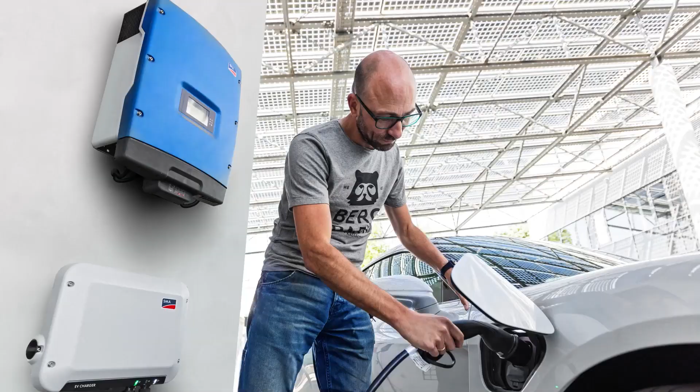In 1981, three engineers founded SMA and became pioneers of the global energy transition. Their vision was to provide renewable energies to people across the globe. Our mission is now more relevant than ever. We want to shape the energy transition with your help.

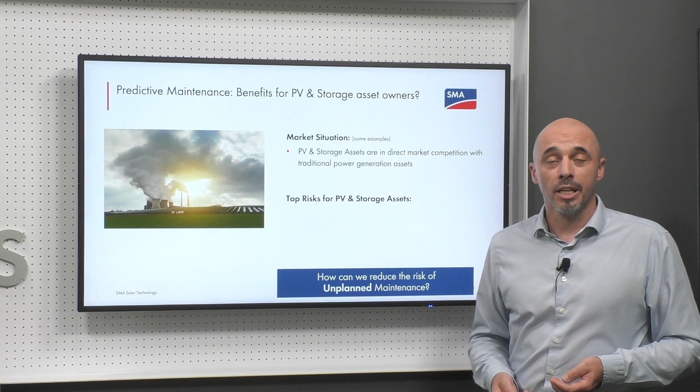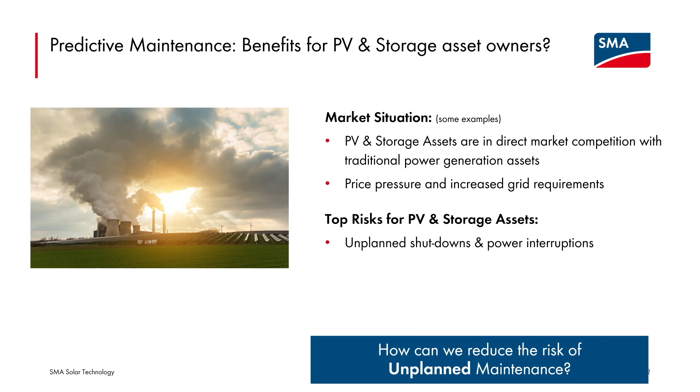PV and storage assets are continuously more in competition with traditional power generation assets. Now the assets in PV and storage plants are under price pressure, and the grid requirements are not getting easier. While there are several risks for PV and storage plants, unplanned shutdowns and power interruptions represent one of the biggest ones, with economical impact.

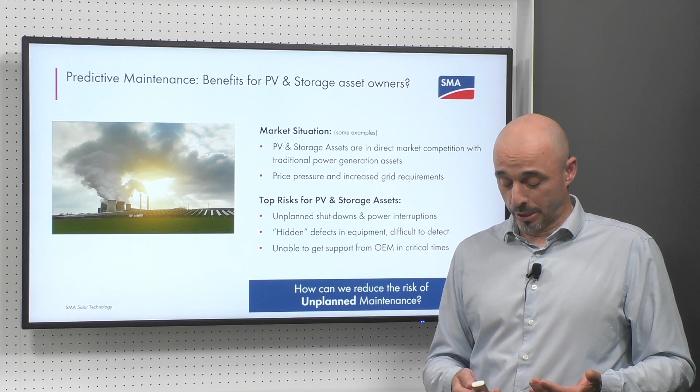Then we have hidden defects on the equipment that are hard to detect and also hard to react to. What is even more disturbing is some OEMs have left the business or are hard to get—think about the pandemic and travel restrictions, and how you want to get the specialist to site. All this together, unplanned maintenance represents one of the biggest commercial risks for PV assets.

So how does predictive maintenance differ from traditional maintenance? We have two basic options. Preventative maintenance is an action that follows a time schedule—parts get exchanged, it's 100% plannable, zero risk for the asset owner, but you may have to exchange a part before its lifetime has ended.

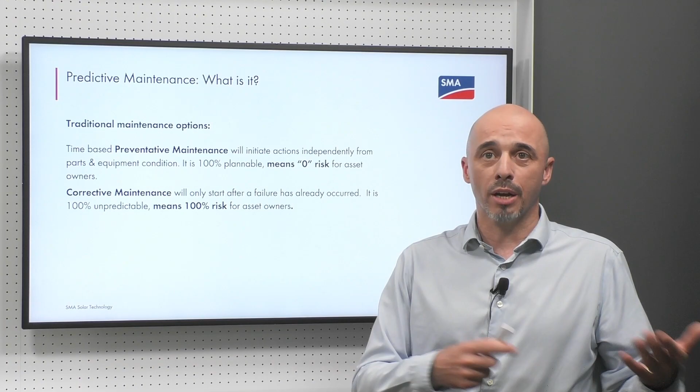Then you have the other one, corrective maintenance. A failure happens and you have to react with a service, with a part. It's 100% risk, you can't foresee it—it could be huge, it could be small.

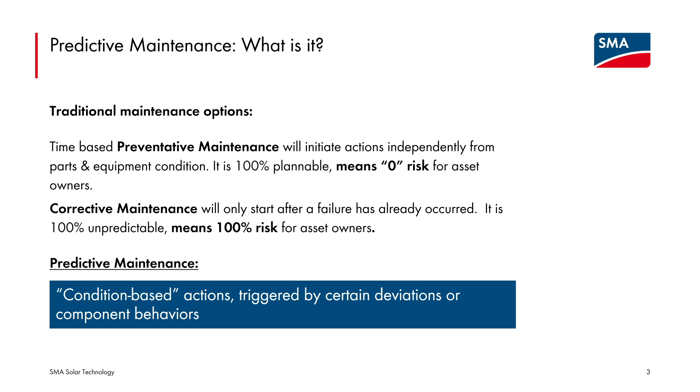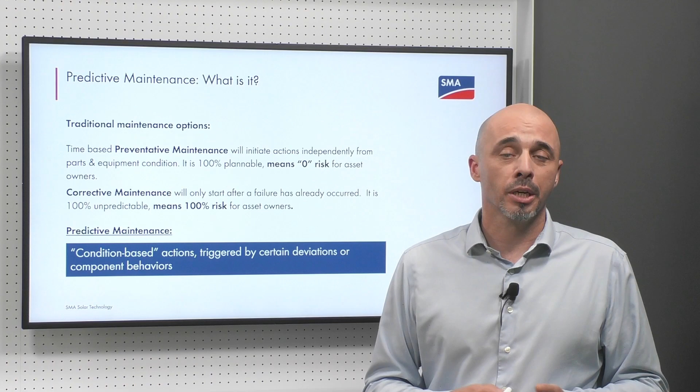So in predictive maintenance, we at SMA try to define condition-based actions. That means we monitor the condition and trigger a certain action based on a deviation or component behavior we observe. Combined with our knowledge and algorithms, that should lead to much slimmer, less costly maintenance. We have all the building blocks at SMA to develop this algorithm, but also to verify that they are correct and not just false alarms that trigger blind action.

Then we have a huge installed fleet. SMA has installed and delivered more than 100 gigawatts globally on inverters. We have data from all operating conditions and environments, and a combined 40 years of experience in field service fixing our equipment in over 130 countries. Our target is really to change the ratio between planned and unplanned maintenance using our smart algorithm, making unplanned risk plannable, reducing downtime, and reducing risk for our owners.

In order to show you how we do that, that's why we have Matthias invited here to show you in a deep dive what we call our algorithms for predictive maintenance. Stay tuned. Thank you.

I would like to give you some technical insight on how SMA approaches predictive maintenance.

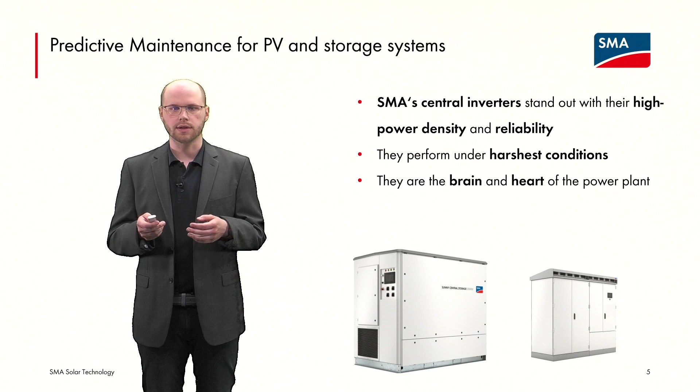We started in the first step with our central inverters, the Sunny Central CP, the Sunny Central, and the Sunny Central Up, because they stand out due to their very high power density and reliability. They stand outside and are exposed to the harshest conditions, in very cold, very warm, or very moist environments. Due to this, they are also the brain and heart of the power plant. They see what's happening on the side of the PV panels, at the battery, in the grid, or inside the inverter. This brings them into an ideal position to act as key to the power plant's maintenance.

Let's look at which issues and components we can analyze. We already have a solid background for fans and power stacks, where we can analyze upcoming issues early and alarm our customers when necessary. The next feature set is the isolation resistance of the PV panels, where we have functionality that gives insights on issues on the PV panel side. We also have background on AC side issues, such as over frequency, over voltage, under frequency, and under voltage. If those happen frequently, we can alarm our customers so they can, for example, talk to their electricity company.

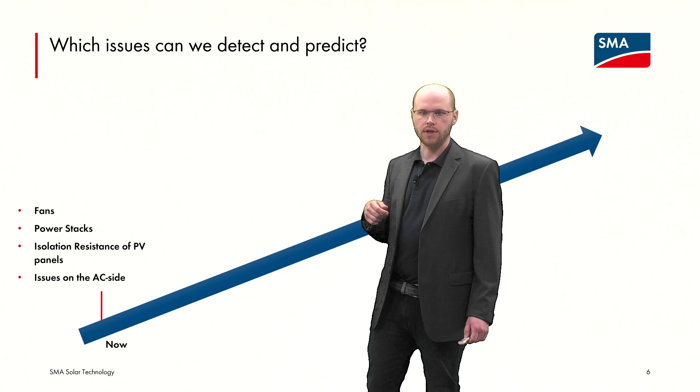As some future steps, we will focus on components exposed to wear and tear, such as the AC and DC switches and the GFDI, so they can be replaced when necessary and not necessarily according to plan. We will also focus on obstacles in the airflow of the inverter, which could cause issues such as frequent overtemperatures, or could be a root cause for other faults. We also want to understand other issues we might have missed, so we can improve our algorithms in the future and alarm early.

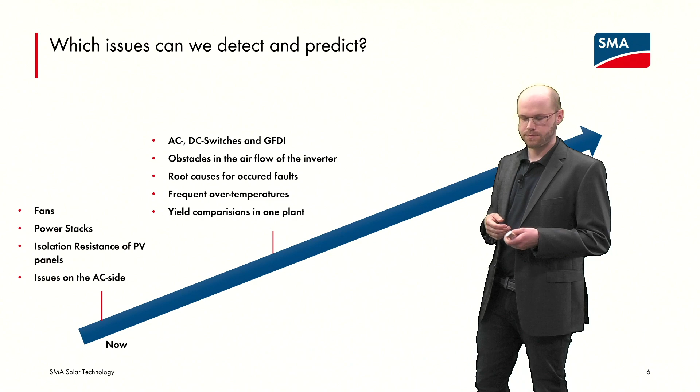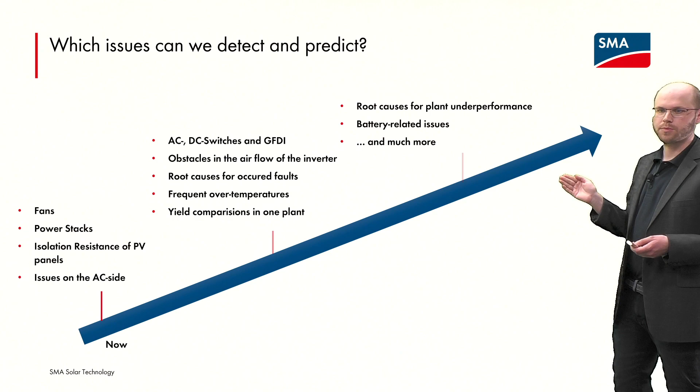Another huge leap will be comparing devices within one plant, to see which devices perform well, which do not perform so well, and then indicate what should be done. Other future steps will be to further analyze underperformances, see the root causes, and rectify them. And of course, we will continuously extend and apply our algorithms in the field, not only for PV power plants, but also for battery and hybrid plants.

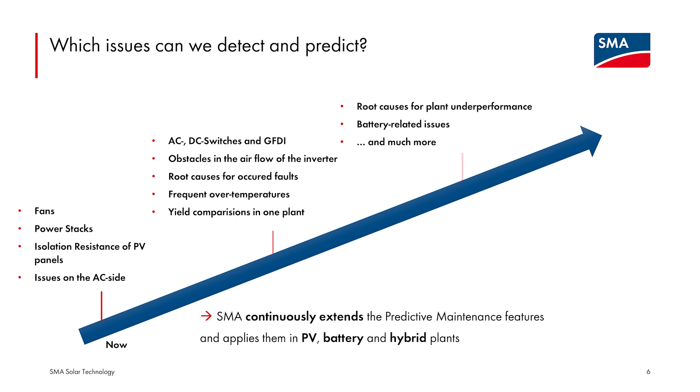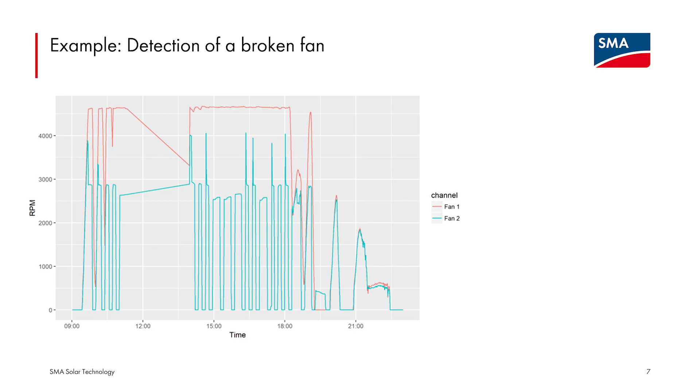To give you an idea of how the algorithms work, we'd like to show you the example of a fan. What we see here is a curve of the fan speeds in the cabinet of the CP inverters. These curves should be overlapping, and we see here that clearly is not the case.

I can show you here in the middle of the day that the red curve and the turquoise curve should be overlapping, but obviously they aren't. The turquoise curve, representing the fan speed of fan 2, is always much lower than fan 1, and we see here that we have a clocking pattern. So the fan tries to achieve high speeds but fails to do so and switches off entirely.

From the experience of our experts, we know this is an indication of a short circuit of the windings of the fan, which results in a complete failure of the fan within weeks. So by replacing this fan, fan 2, early, we gain a couple of weeks of time and avoid underperformance of the plants.

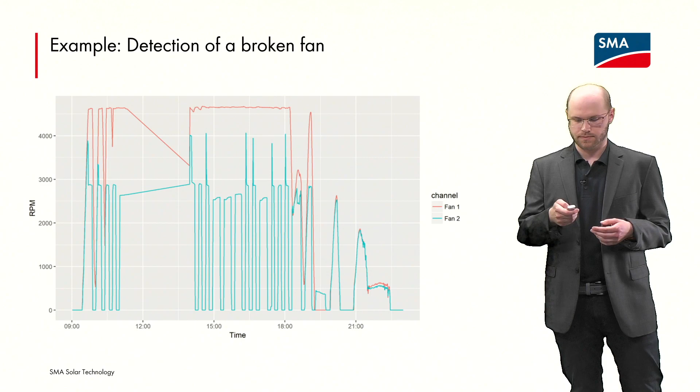But of course, the algorithms alone are just a small piece in the entire chain of the predictive maintenance algorithms. And key is always the customer, who is at the end and at the beginning of the entire predictive maintenance chain.

After talking to our customers, we can connect the inverters and power plants to our backend, for example by switching on FTP push, or connecting the power plant manager to the plant and activating it so the data is sent automatically. Then, respecting all aspects of cybersecurity, we send the data to our SMA backend and store it in a large database.

In this large database, we have our predictive maintenance algorithms running, looking for anomalies in the plant at all times. If they detect an anomaly, we can see this in internal monitoring tools, and we can also create service tickets in Salesforce.

If that happens, our service technicians see this in their everyday work and can talk to the customer and decide on the next steps to rectify the issues.

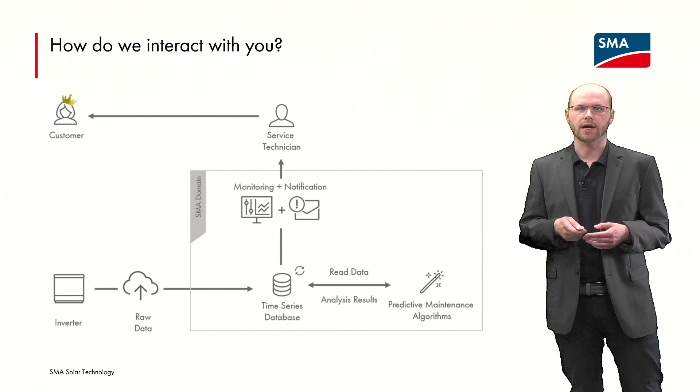And this isn't just an idea, it's a system we have up and running and are currently applying in a field test. To elaborate a bit more, it's not a small field test. We're doing this globally with lots of customers and have around 1 gigawatt of inverter power under maintenance in our monitoring.

By doing so, our customers can already benefit from the feature set for predictive maintenance that we have right now. As we gain experience over time, our feature set will improve, grow, and just get better. This is the end of the deep dive, and we'll switch back to Bernhard to continue with the presentation.

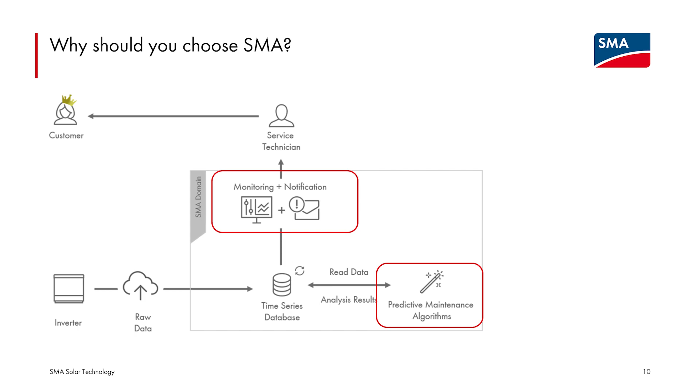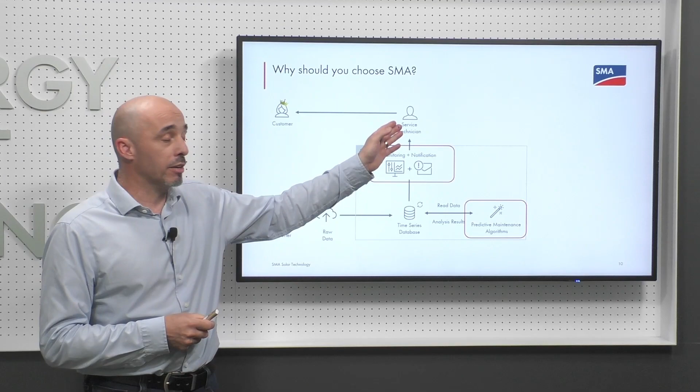One main differentiation you can see here on the screen. In the market, you find a lot of companies that offer monitoring and notification services if something fails or deviates. Some competitors offer predictive maintenance based on your data. If you look at SMA, we can provide the complete system from the knowledge of the inverter and how it's designed and built, to the sampling of the data, to the monitoring notification piece, and we have the algorithms we developed ourselves. At the end, we even have our own technicians that go to site and can verify that it's not a false alarm, but really a serious issue that needs to be taken care of right away.

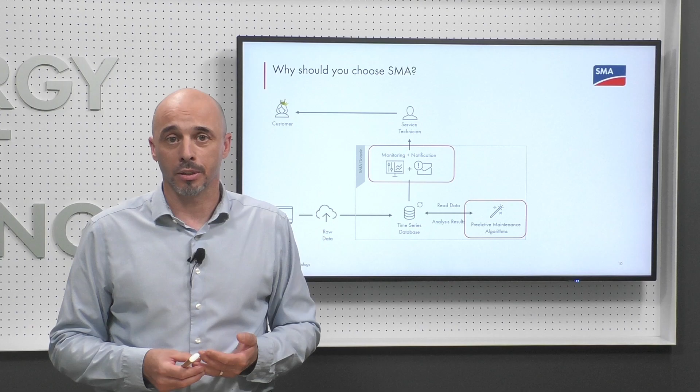By owning the complete chain of events, we can also be much faster in reaction to the customers without having to go over different company boundaries and then inform a lot of people. This opens up the possibilities of a lot of benefits that customers can get out of it.

First, it's a significant reduction for unplanned shutdowns. That's, of course, the main purpose of predictive maintenance. With that comes an increase in uptime for your asset, even more important for storage assets. You can opt to plan better, include this in your maintenance planning and maintenance tasks, so you take the stress out of your company. And with that, of course, comes a lot more simplified labor and parts planning.

Think about just the last 18 months that we have passed through the pandemic and what stress that put on logistical issues and on services to travel to site with restrictions in place. So here we have a simplification and a relaxation of the whole chain that comes into action once you have a failure.

Look at the costs at the end. It aims to reduce costs on your services, and it makes your OpEx plannable and optimizable. With this, we can create a true win situation for our customers, an end-to-end data chain that comes from the inverter until the action in the field.

And this opens up the possibility of automation. As an example, what we can do with predictive maintenance and with the data, that also not just serves our technician, but the customer's technician or anybody out there that works on our equipment, is our virtual support app that we have been launching since last year, and that's basically rolled out in the field. We have a video with us that we will show you that shows the usage of this data, and it's part of the journey to a digital service world that we are already on. So please enjoy the video.

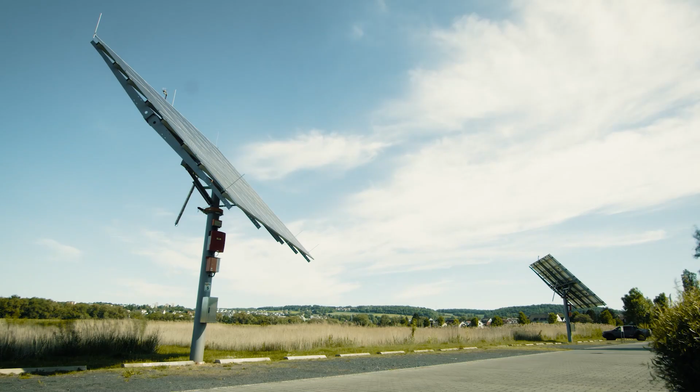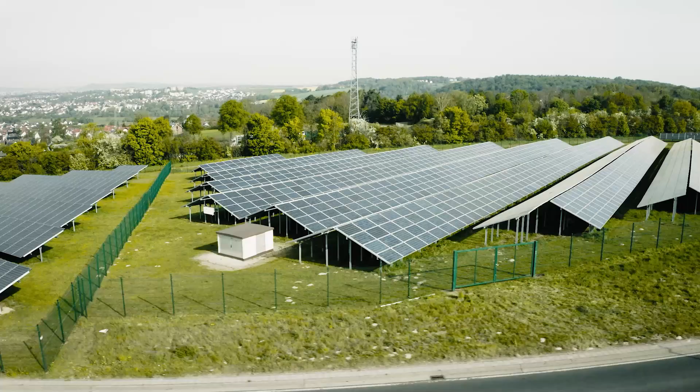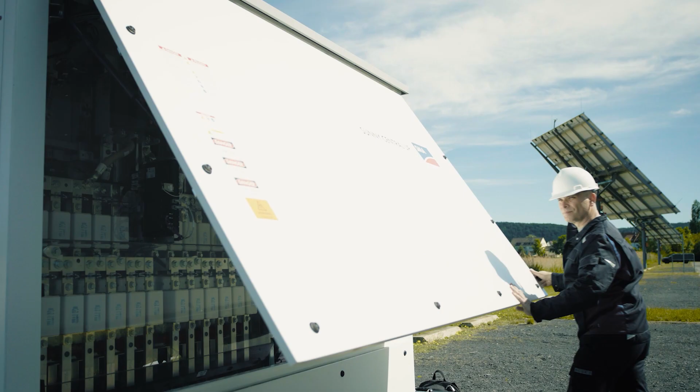Unscheduled breakdowns, repairs, or maintenance work can often lead to costly downtimes. The waiting time for a service technician is usually much longer than the actual troubleshooting time. It is much more efficient to carry out repairs immediately without the need of an additional service technician from the manufacturer.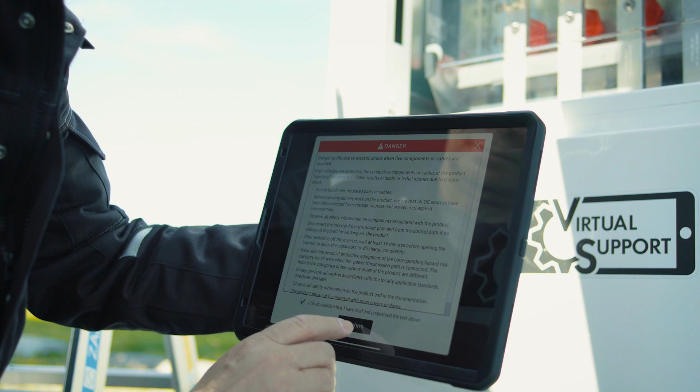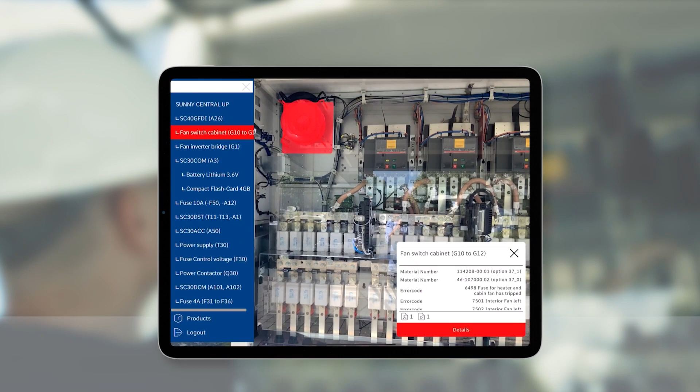Customers of SMA solar technology are already benefiting from this digital support for repairs with the Virtual Support app after a service training. Customers first download the app from their device's app store. To start the application, the technician scans the marker on the inverter with a smartphone or tablet. The Virtual Support app visualizes information about the components, their positions, and combines the associated documentation, such as circuit diagrams or service information, in one digital platform.

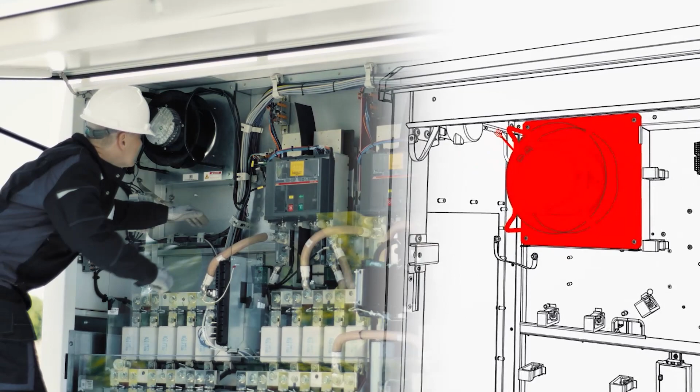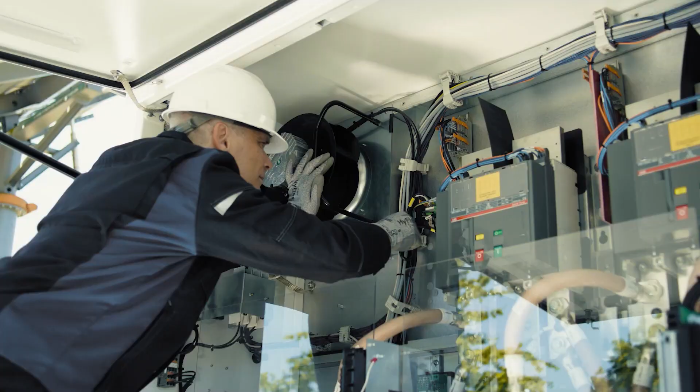Industrial-grade augmented reality technology is provided by Oculavis. If a component is defective, the technician carries out the repair independently using video or step-by-step instructions. A functional test completes the work.

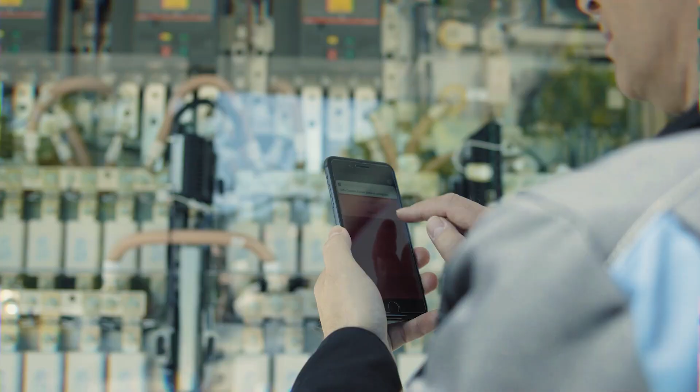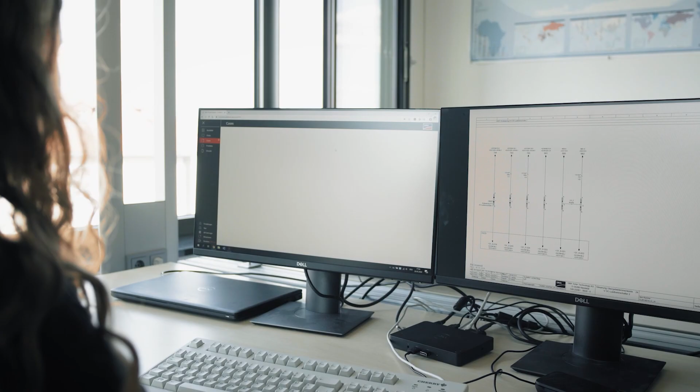If further technical support is required, technicians and SMA experts connect with AR-powered video calls using a smartphone, tablet, or smart glasses. Augmented reality overlays enable the SMA expert to offer precise instructions to the technician on site. Screenshots or video recordings document valuable knowledge and can be transferred to other applications.

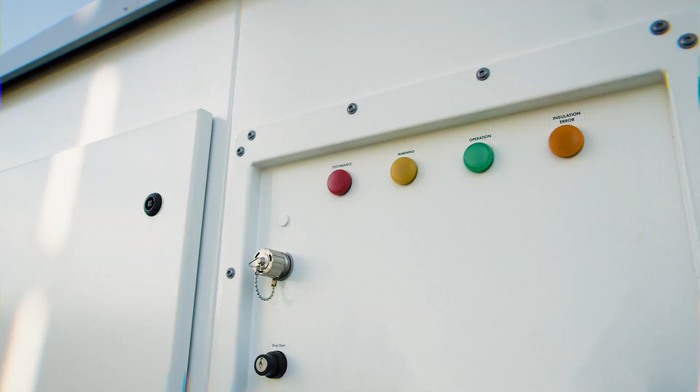SMA successfully deploys the virtual and remote support app and inspires its customers worldwide with a sustainable, digital, and customer-oriented service. These innovative solutions save valuable time and costs of on-site operations, minimize downtimes, and thus increase the profitability of PV systems.